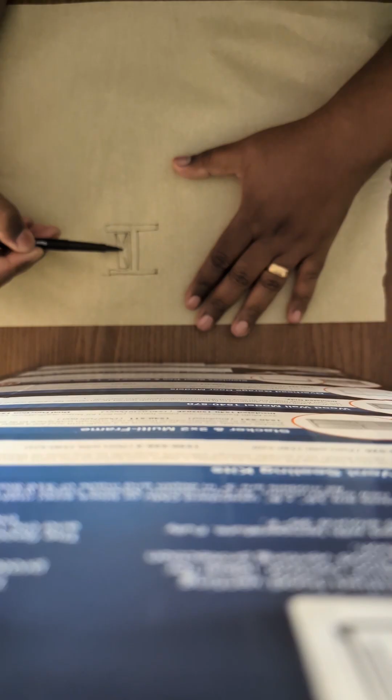So the first one that we mentioned, oh, you can't see that. We're using a W section of steel, right? So it's a wide flange. It's called wide flange because the flange of steel is wide. And what we do is we take wood, like a 2x that will fit inside of here on both sides, because we're doing both sides, and then bolt through the steel.

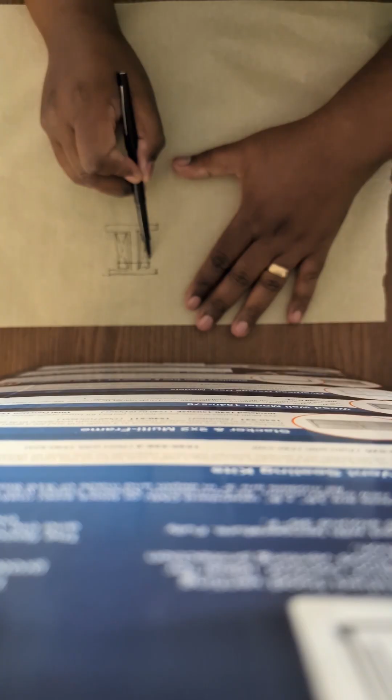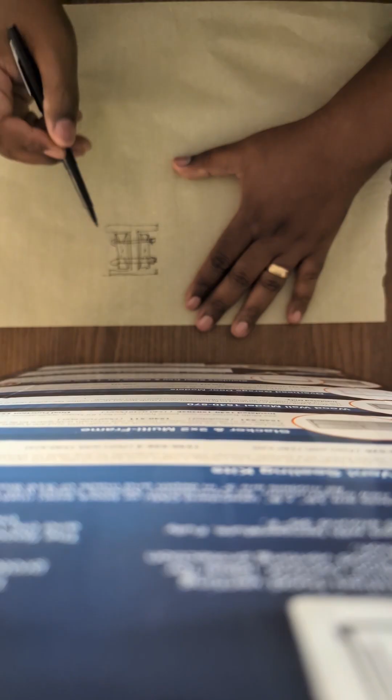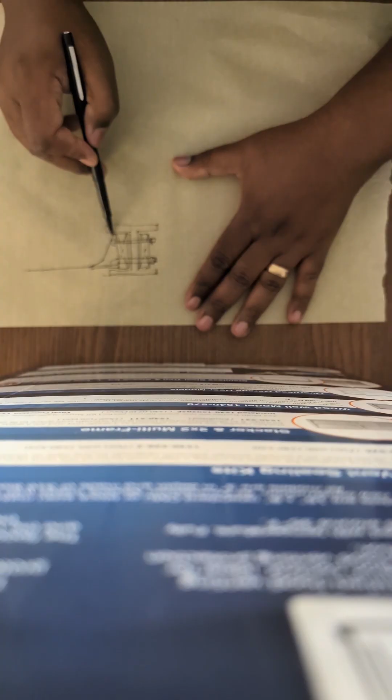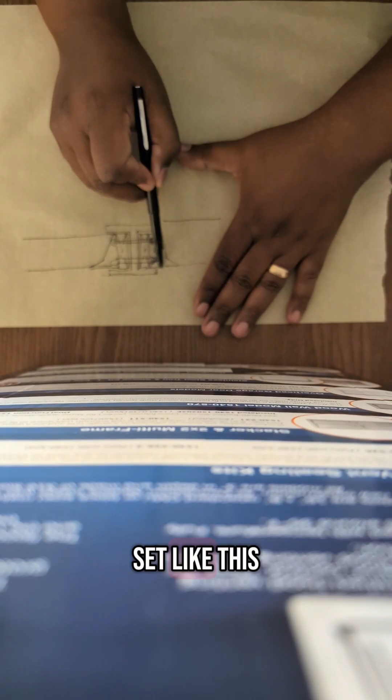And then you can put your joist hanger on that wood and have your joist sit on there. That's method number one. And in this case, we had to essentially beef out the wood, so I'm just going to beef it out, so that when we put the hanger here, the wood actually sat like this. That's the method that this project used.

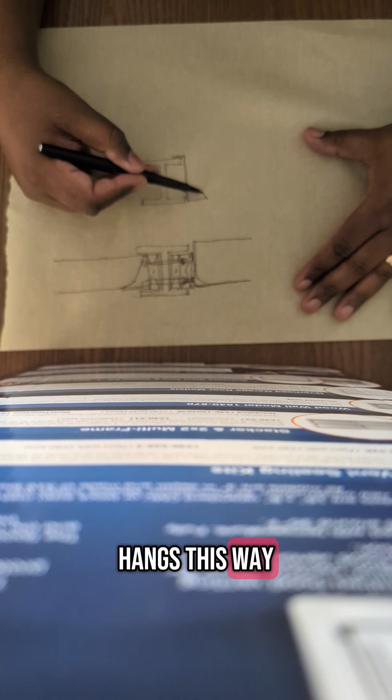Now, the other method you could use is using the same piece of steel. Simpson makes what's called a top mount hanger. A top mount hanger hangs this way, and it goes over the top, and then you can actually weld. Oh man, I'm trying to draw this upside down. You can weld that edge down onto it and put your wood right there.

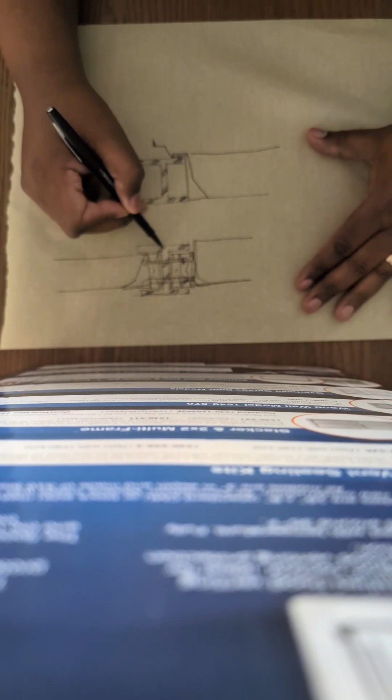Both methods work. This is the one that most of the contractors I know like to work with. Just so we know what we're working with here. And that's kind of the two methods you can use for hanging wood joists off of a steel beam.

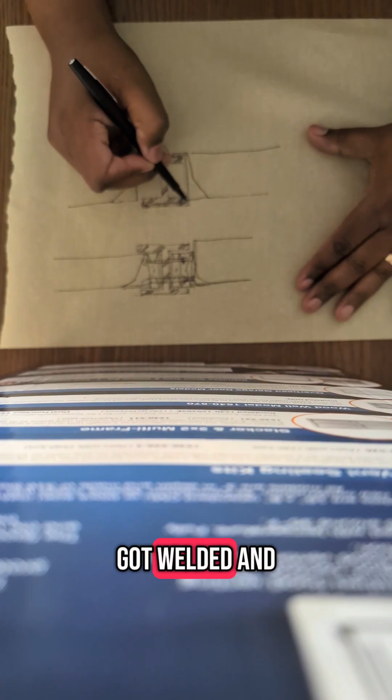And then you've got to make considerations for some other things, like how do you actually hold the steel up. In this one we have a plate that we put on the bottom here, and then that got welded, and then we have a beam below. This one was an HSS section, which stands for hollow structural section.

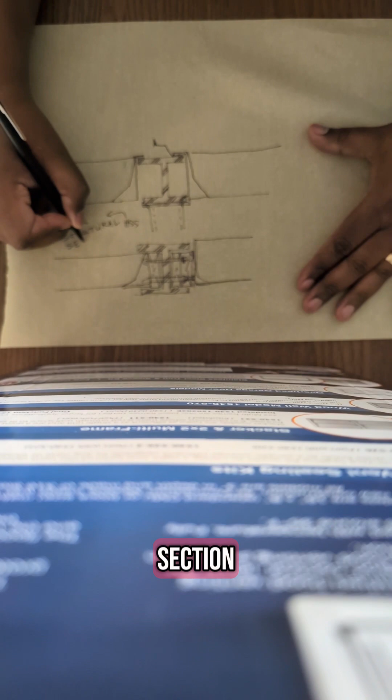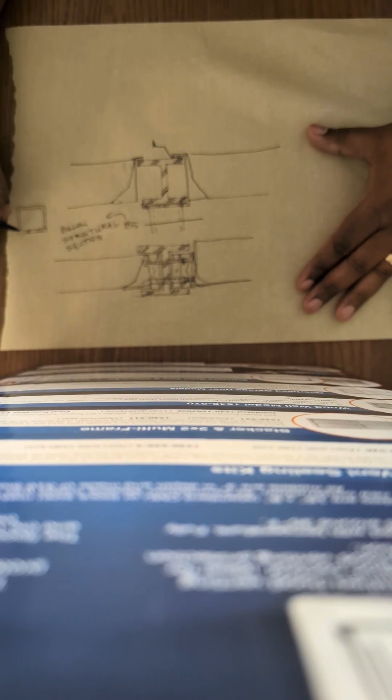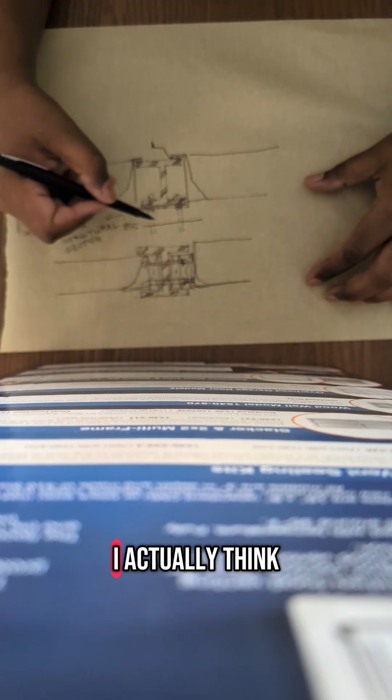And it's called that because if you were to cut it this way, the center of that piece of steel in plan is hollow. There's nothing here. Hollow structural section, wide flange, plate, and then there are a couple methods. You could bolt this to the plate or you could weld it. I actually think they bolted in this situation.

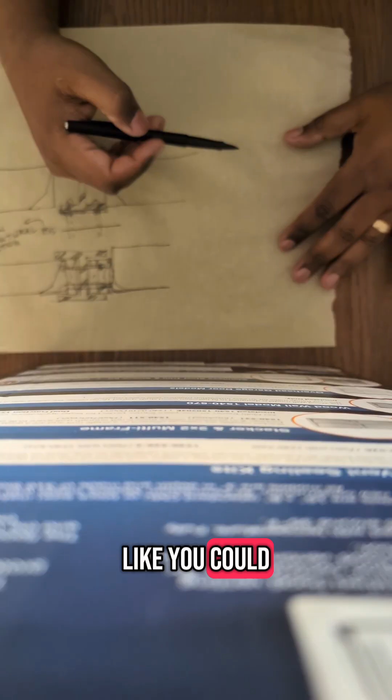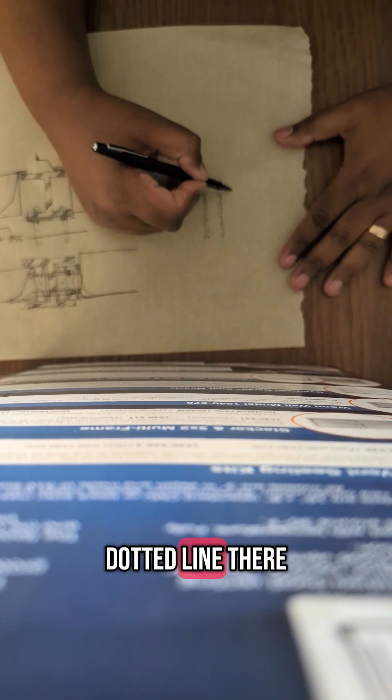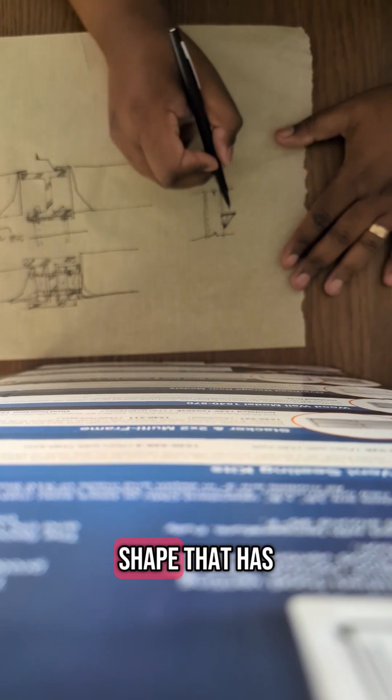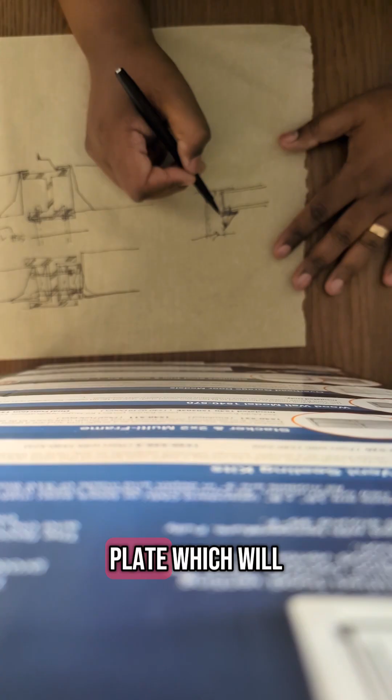There's also other means for making this connection. Let me just make sure I'm still in frame. Yep. That hollow structural section, and we show that it's hollow by putting a dotted line there. You could put what's called a gusset plate on there. So basically that's a plate in a triangular shape that has a ledge that this W section can sit on. And you may want to bolt that and then weld this, or you could do even a through plate which will go through the HSS.

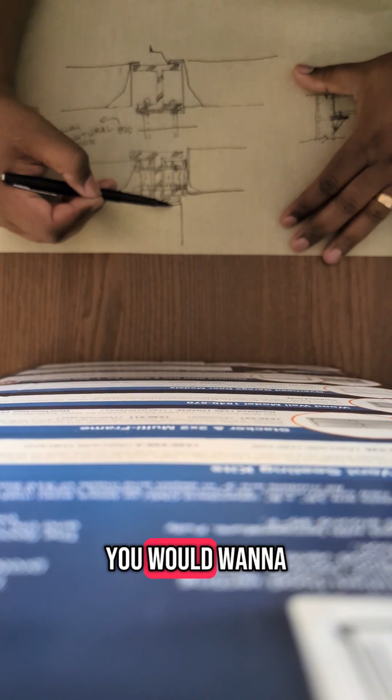There's so many different ways you could do this, and so typically I will talk to the contractor about what their comfort is and what they're used to doing. You could even size it out depending on the loads so that this sits on wood. Let's say we're doing this in wood, you would want to make sure you have more than the width of this in wood. And then it becomes a bearing situation.

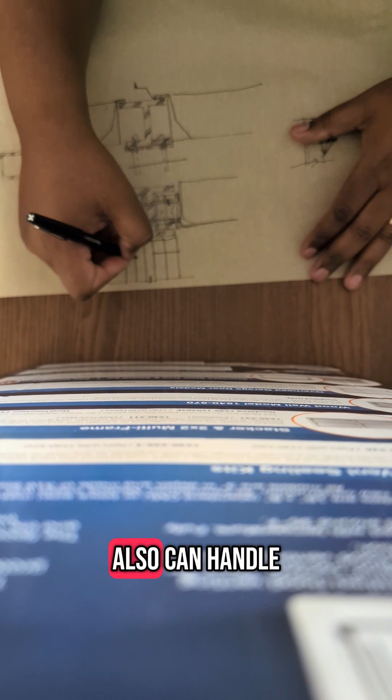But you want to make sure that whatever this is can also handle the weight, so you're nailing or using structural screws, or maybe you have a long Simpson structural screw that goes through the whole thing, or MiTek or one of those. But you want to make sure that the loads are not more than what can be under here.

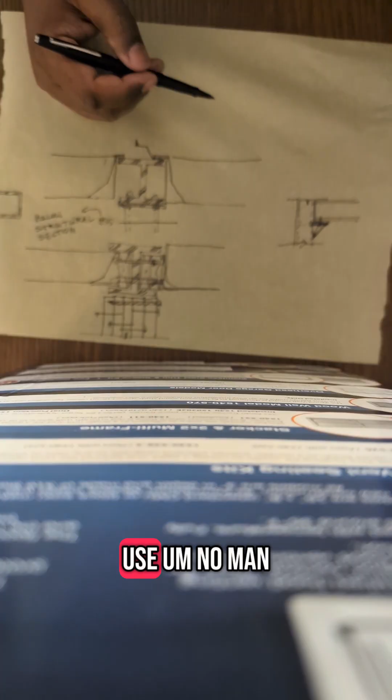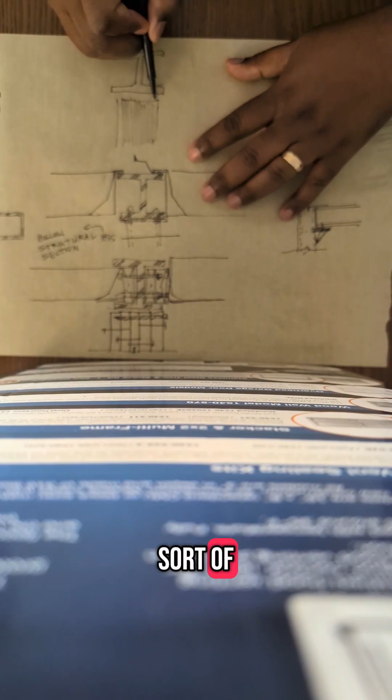Or you could use, oh man, we're going deep into this now. Wide flange section. You could size out, say, a PSL, parallel strand lumber. Typically, if this was in section, we'd use some sort of hatch to show that it's an engineered lumber. And you might still need that steel plate on top, or sizing out whatever, to take that load and essentially distribute it to the beam that can carry it.

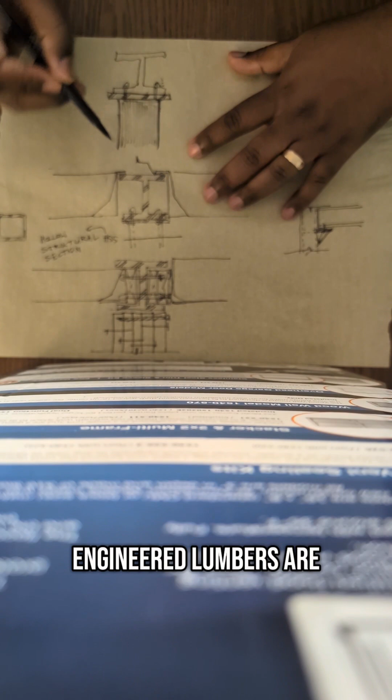But engineered lumbers are very strong, and if you're in need of steel for the beam, you might not be in need of steel for the column. So those are some of the many various ways in which you can handle that. And I'm sure there's more that I haven't even gotten to or drawn out here. So hopefully that helps.